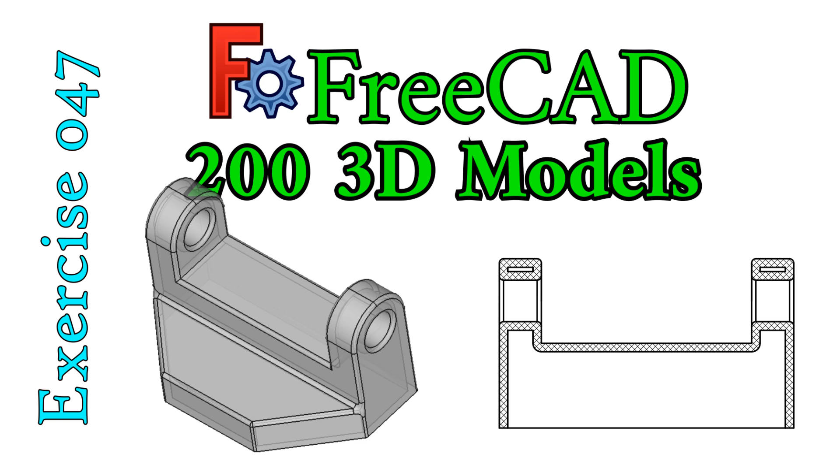Today I want to work on exercise 47. Exercise 47 is simple, but it's not a one-sketch job. It's rather a two-sketch job. So this is 70 millimeter. I want to make that half transparent.

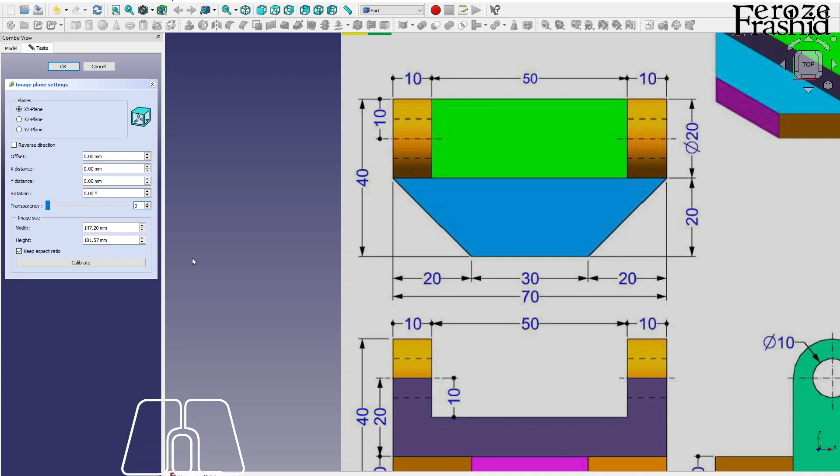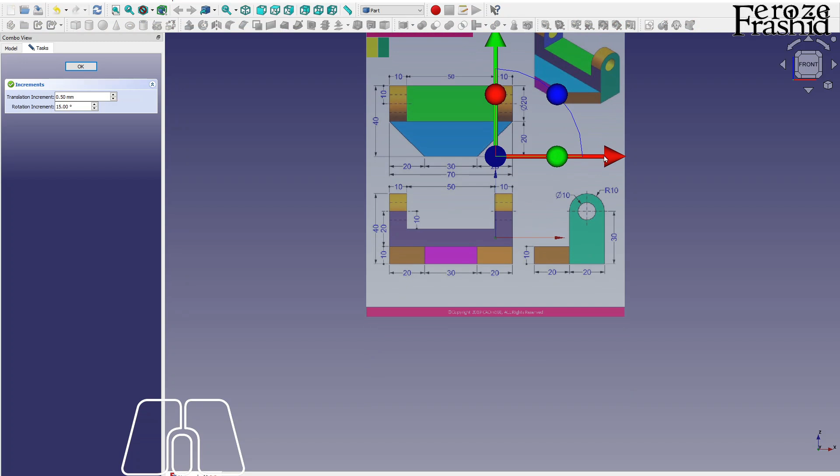And I am thinking I can make this model from the front view, which is this view, right? That is on XZ plane. So let's go ahead, trace that one, the front view. I want to build only half of it. So I want to place that axis cross right here. So let's go ahead, relocate that, right? There. Cool.

Let's start sketching then on XZ plane. Remember, if the image is on XZ plane, I'll have to start drawing on XZ plane. And I want to build only the half of it. And then I'll be mirroring it. So build only half of it. All right.

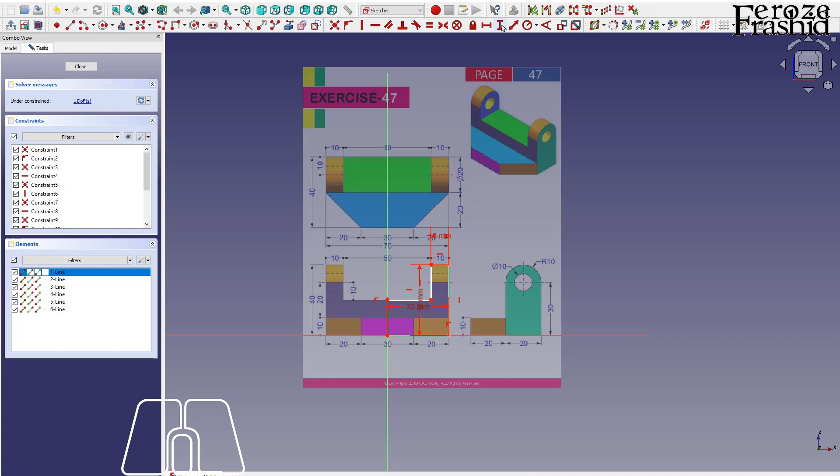So this is 10. The height is 40. And this width, I'd rather go this width, which is 20 plus 15. What else? This height is 20. Pretty cool. I want to extrude that backward for 20. Because I'll be building this one on the front side, so I wanted to push it back.

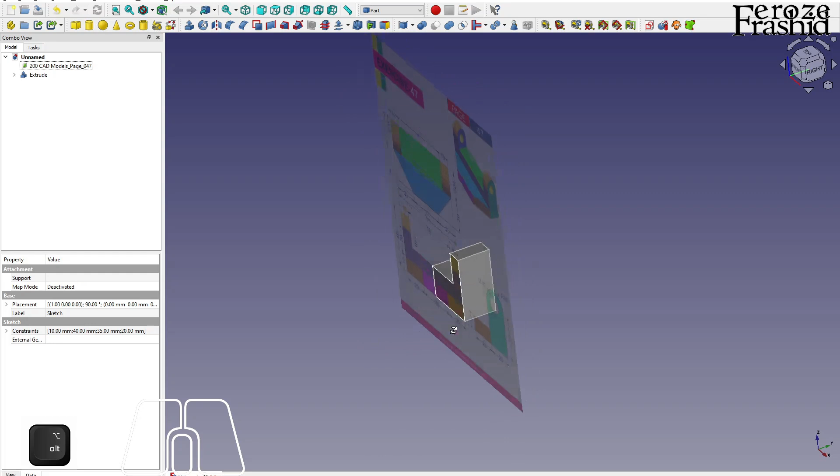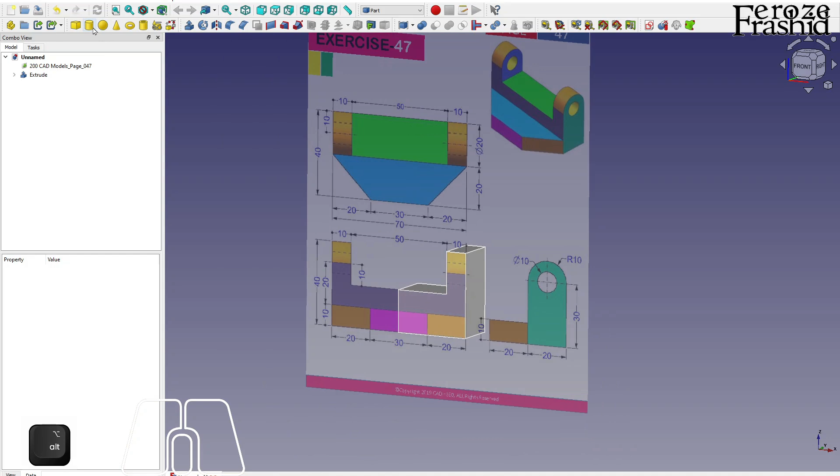All right, now on this wall, I want to draw this. So inside diameter is 10, outside radius is 10. What I want to do, I should probably not draw another sketch. I can deal with that with a cylinder. So that cylinder, the inside diameter should be 10. The radius is 5, right? And height, let's go wild on that height. I want to make that flat. That will do, right? And the height is 30.

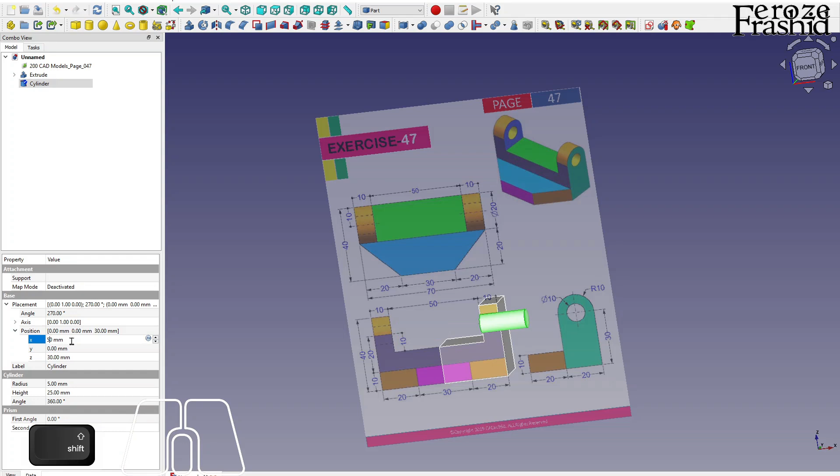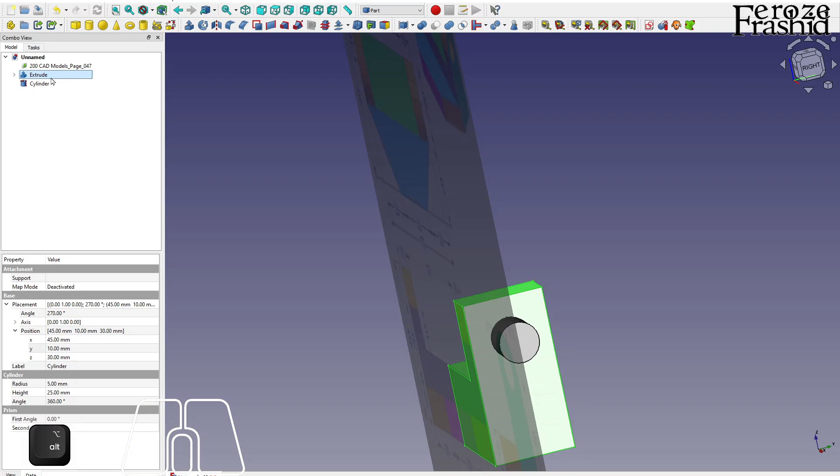Let's make the placement position on the Z 30, right? And let's push it somewhere here. So on the X, let's make it 50. Too much. Maybe 45. Yeah. Let's push it back by say 10. Let's see if 10 will do. Yep, that's about right. So it's right where we want it to be. Now I want to make a cut to make that hole.

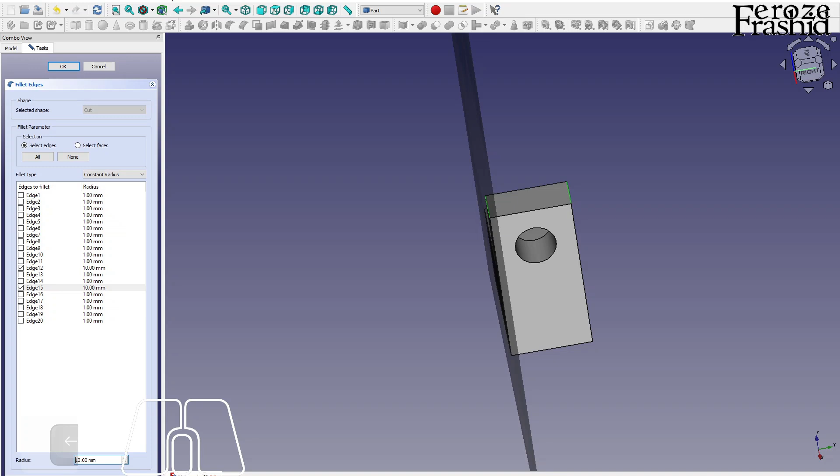I want to make these two fillets, right? And so the radius should be 10. Now 10 will put them right on top of each other. So I'm going to go with 9.999. Still too much. Too many nines. How about 9.99? Yeah. So FreeCAD is pretty specific about this fillet, and that's why actually I try to avoid fillet. Not a big deal, but it paid off here.

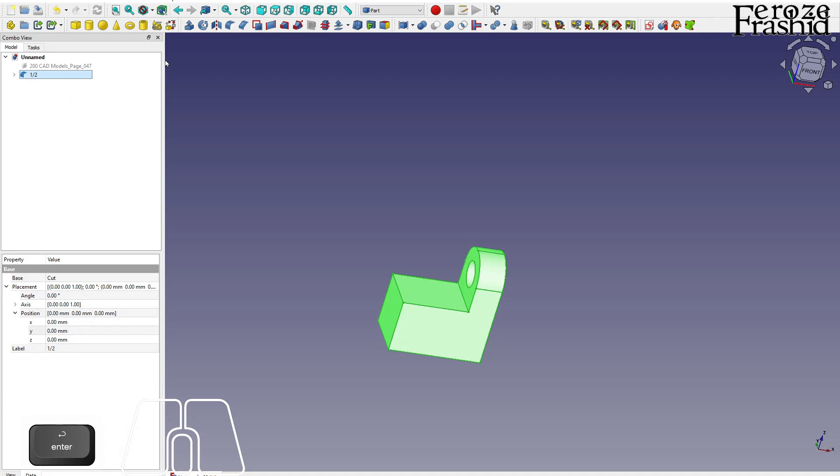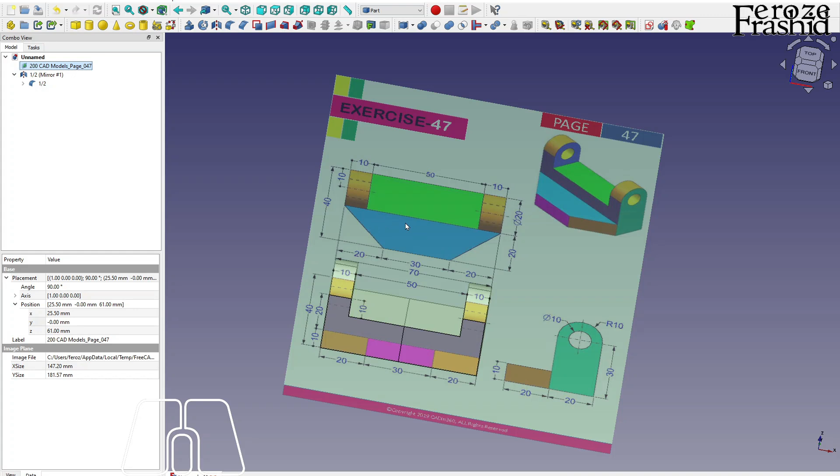What I want to do now, I want to take this. I want to mirror it on this face, which happens to be YZ. So YZ plane. And make them one piece. So with the top, we got our face. Now I want to build this trapezoidal area. The length is same as 70. The middle part is 30. This is 20. I can probably do that without the image.

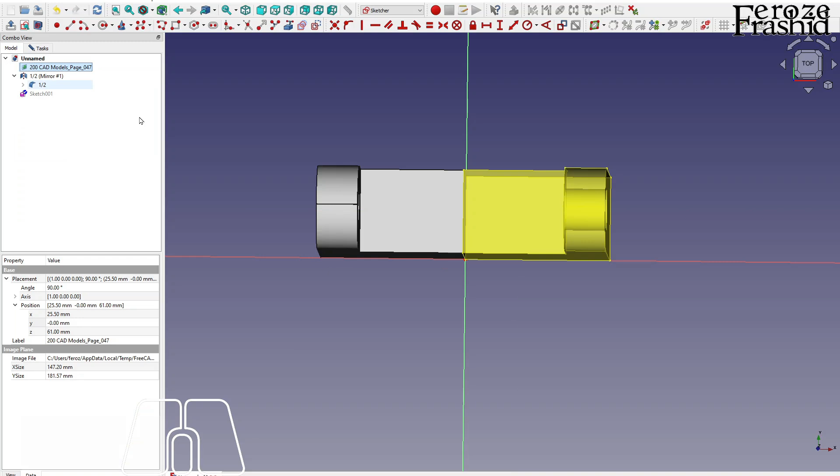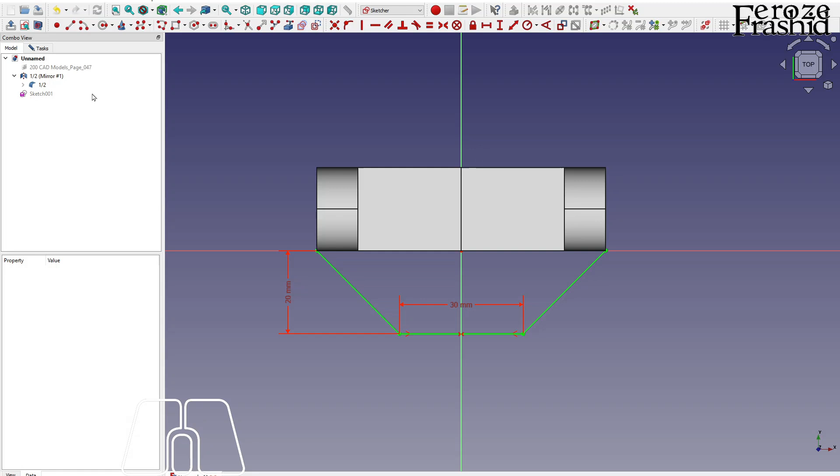So what I want to do is pull in this geometry, or maybe these 2 points. That will do as well. And take this from here to there, make a trapezoid. I remember this distance is 20, right? These two should be symmetric, that way we won't have to worry about the angle. This is 30. That constrains everything, right? It's closed.

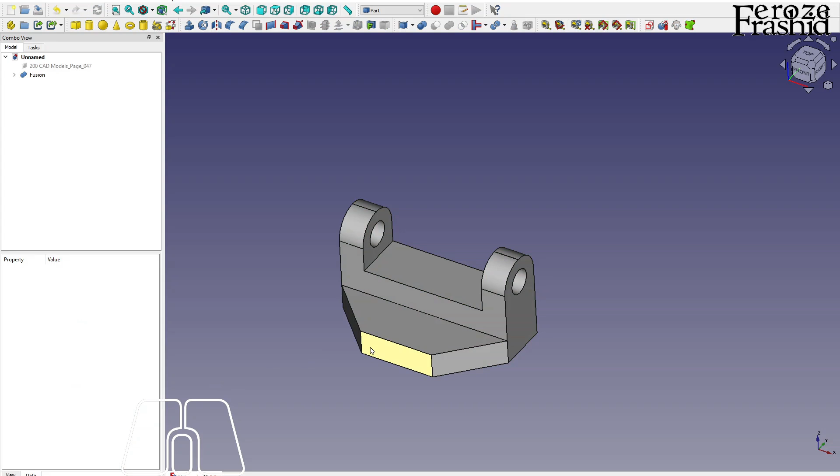That looks like the object that we are going for. And that height is 10. I believe that's our object. Pretty easy. I'm gonna take all these three, make it a fusion, make it true, right? That is our object. Very simple. It is so simple that I don't feel like it should have been 47, it should have been 44 maybe.

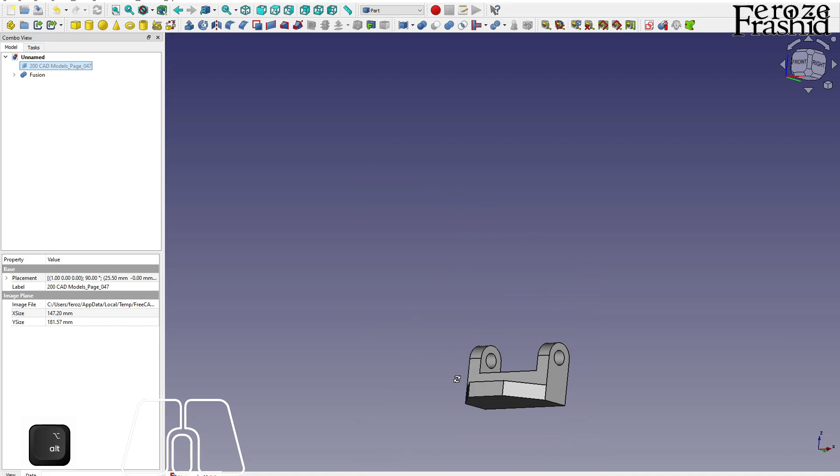So what I'm going to do, I'll take this a little bit far. How about I make this as a shell? Say I want to make the same object, but the inside would be hollow. It will be a 2mm thick shell. The simple way to do it is, it's a fusion already now. I can take this face and hit thickness here and make it a 2mm shell. Right? Select the skin and hit OK.

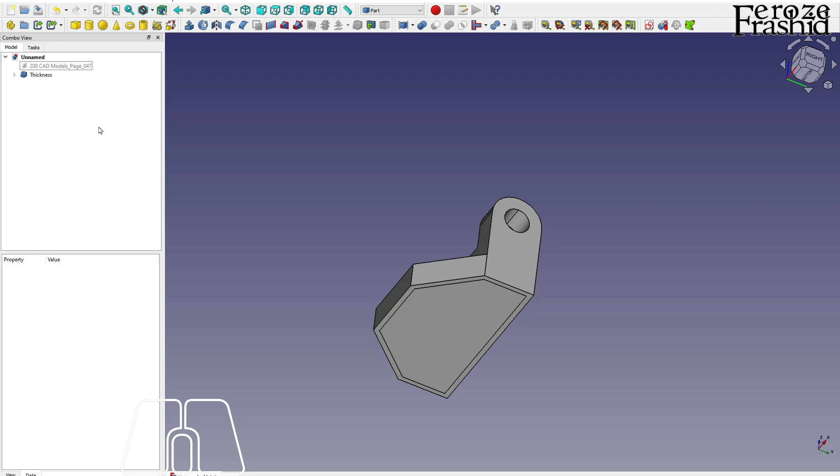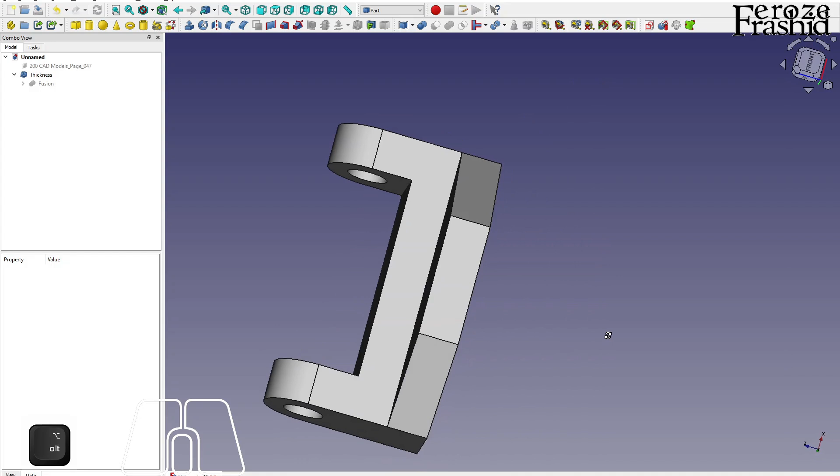It did work. Hold on. So the fusion is still visible. There it is. Dang, it was easy. I'll be honest with you, I was surprised to see this thickness button working. I honestly thought it would not work. FreeCAD is awesome. Alright, so we got the shell, and I can also make it look beautiful.

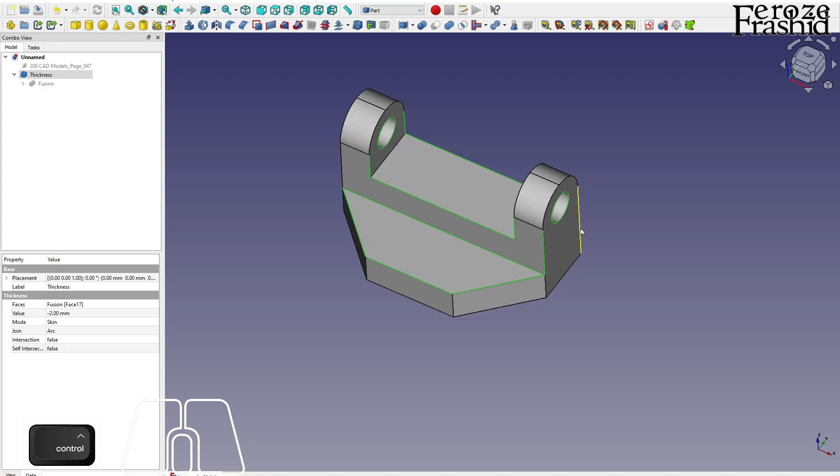Say I want to select these edges, right? And these, maybe these two. So I'm selecting all the outside edges, right? And make it a fillet of 1mm. Let's see if it worked. It worked, but it looks weird here. Let's see.

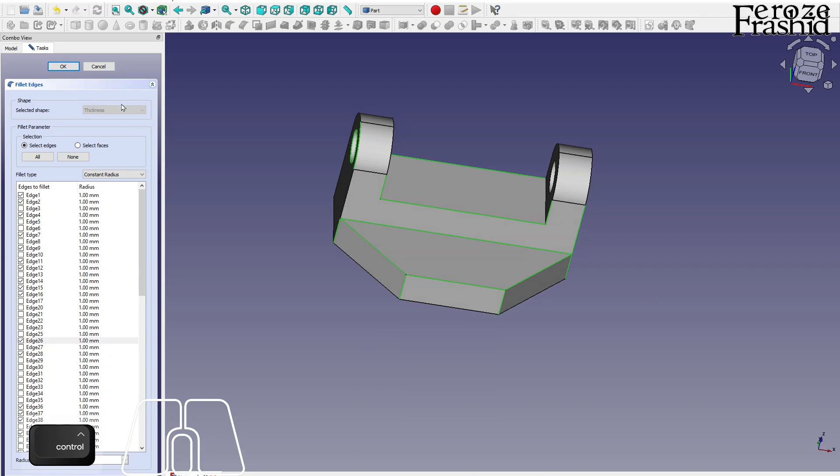Oh, I haven't selected that line. I thought that would continue. I select that line. Select this line as well. See if it makes any difference. Actually, it does. Now it does look like a factory-made shell, something like that. Well, folks, there it is. Exercise 47 with a couple more bonus steps in it.